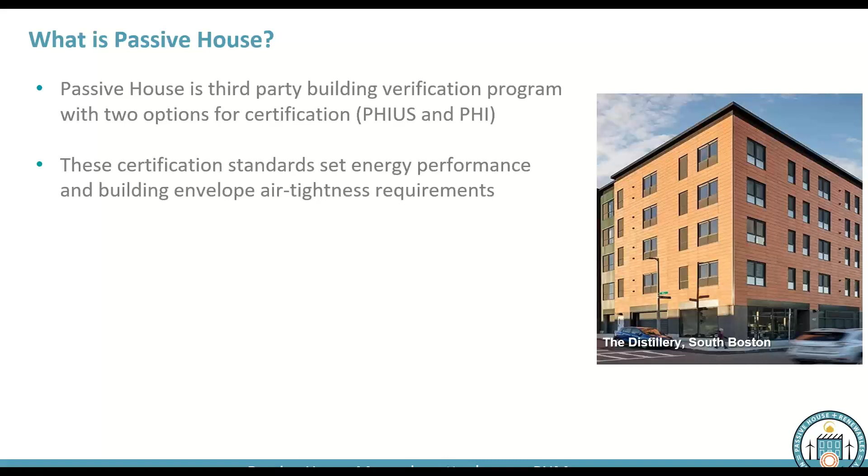The standards themselves are set based on energy performance and building envelope air tightness requirements. So that's sort of where the standard for Passive House comes from, energy performance metrics and air tightness requirements. We'll get into a little bit of those details to give you an idea of what those metrics look like a little later today.

Passive House buildings are designed and constructed to meet these metrics, and they can do that with any various methods, materials, strategies, anything that the architects, contractors, engineers involved can come up with. There's no prescriptive list, no checklist of things you have to do during construction, no points awarded in different categories. Simply these metrics that you hit at the end of the day, and however you manage to do that, you're able to do.

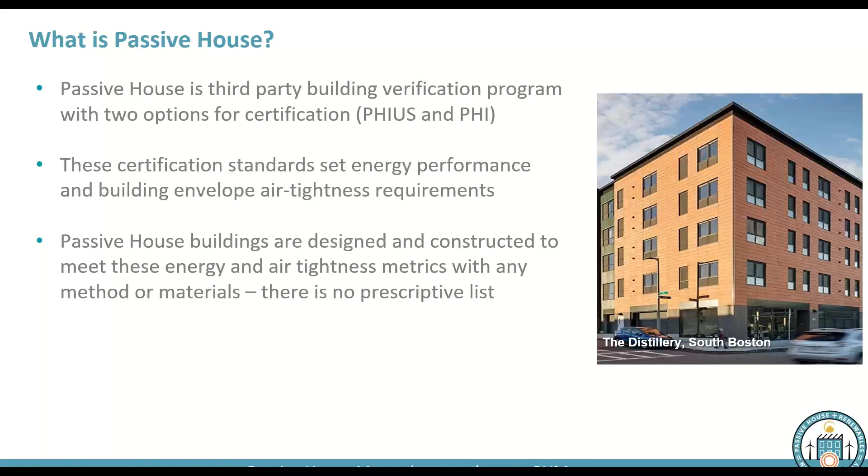So what do you achieve by doing Passive House? Heating loads, which are probably the main focus where Passive House really zeroes in, or at least originally where Passive House focused, was on reducing heating loads, and they're reduced by 90% or more compared to a typical building. This can vary a little based on what we consider a typical building, but as a general statement, it's 90% or more compared to a typical building.

Overall energy demand, so when we look at heating, cooling, hot water, plug loads, appliances, all energy in a building, that can be reduced by 60% or more. We're going to take a look at some actual data a little later to show how accurate this actually is. We are talking about 60% or more reduction in total energy.

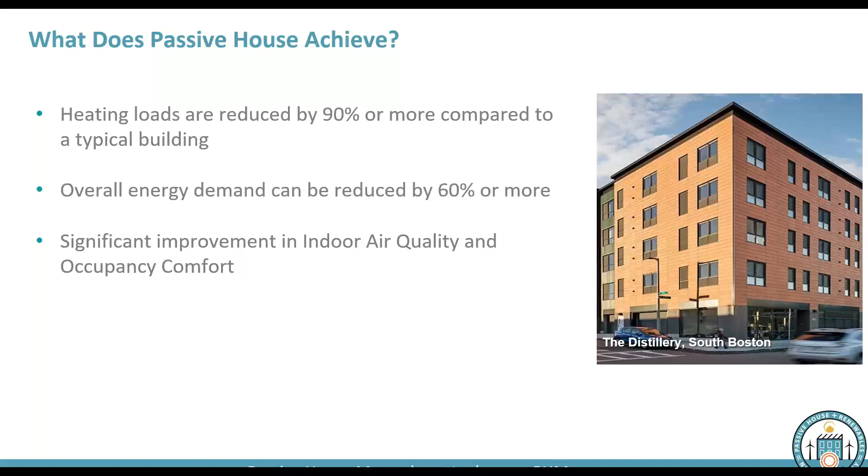We also see a significant improvement in indoor air quality and occupancy comfort. We don't have enough data, I think, to really say we see a 60% improvement in indoor air quality or something along those lines, but we know there is a significant improvement. And it's becoming a larger and larger reason why a lot of developers, especially in the case of larger project developers or single-family clients who are pursuing this, are pursuing Passive House.

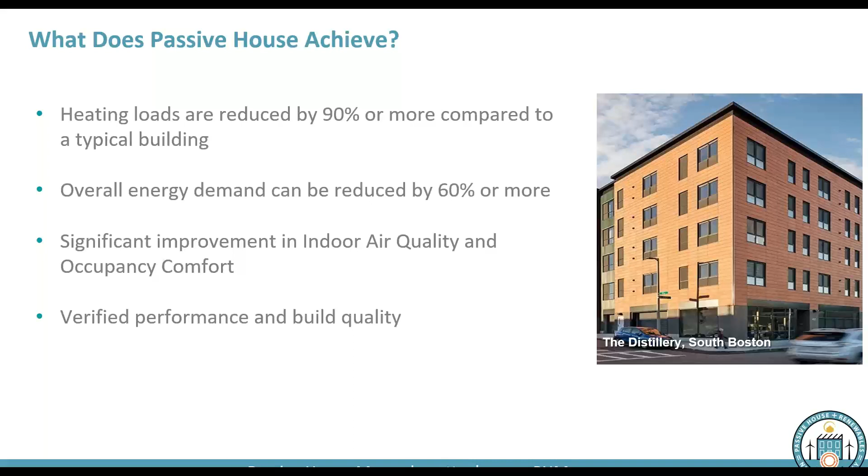Energy performance is one thing, but a lot are pursuing it because it just produces a better quality environment to be in. Passive House also achieves verified performance and build quality. You have third-party assurance coming in and verifying your project, making sure it's built how it's supposed to be built, making sure the quality level is high. That way you're delivering a really well-built, well-constructed building that's going to perform to these levels of energy reduction for a long time, that's going to last for a long time, and resist building failure issues that might come up in more typical projects.

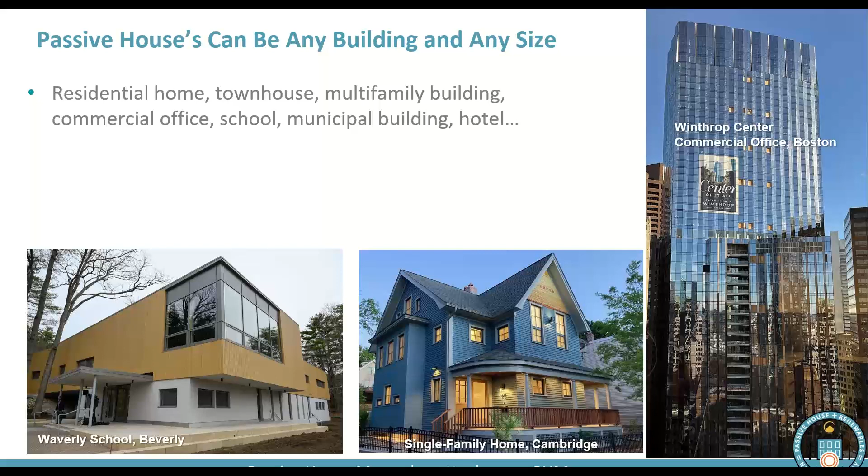So these are some of the big things that, by building to the Passive House standard, you're able to achieve. As I mentioned at the beginning, Passive Houses can be any building. Despite the name, we see homes, townhouses, multifamily buildings, commercial offices, schools, municipal buildings, hotels, even a hospital I'm going to show you in a moment. Any building type can be a Passive House. All three of these projects you're seeing are actually up in Massachusetts, but we have a school, a single-family home, and a large commercial tower. So any building can be a Passive House.

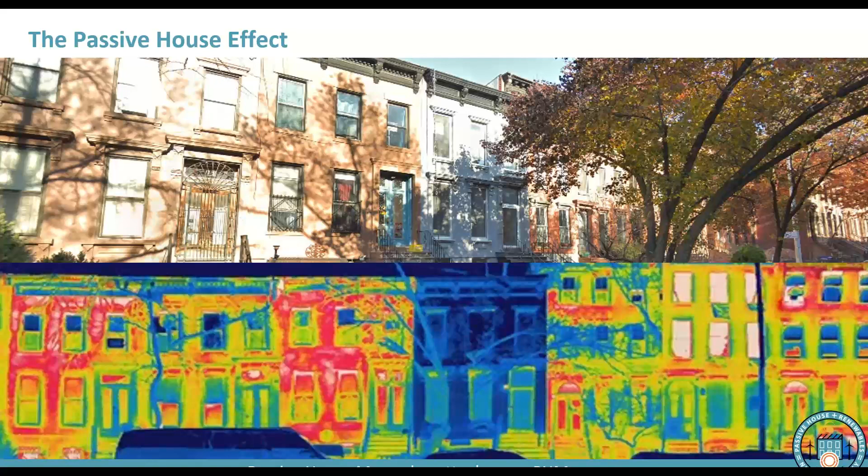So on a passive house project, there's all kinds of different roles that people take on. And as you explore passive house, you're going to learn about these different roles, you're going to hear them, so I wanted to provide a little summary to give you an idea of what these roles are.

Starting with the design phase, we have what are called consultants or designers. They're usually going to be a PHIUS certified consultant or a PHI certified designer. So you might hear acronyms like CPHC or CPHD - that's what those are referring to, these certified consultants. These are the primary leads on the passive house process.

On a project, one of the first things a developer will bring on is this passive house consultant. Sometimes these are in-house with an architecture firm, so whoever the architect is on the project might have the CPHC in-house. Other times they're an outside consultant brought in specifically for that project. It varies from project to project what approach is taken, but either way, you're going to have a certified professional involved who's going to take the lead on the passive house aspects of it.

You're going to have an energy modeler. This person takes the lead on running your energy model. Passive house uses very specific energy modeling platforms, known as WUFI or PHPP. Both exist - generally, projects certified under the PHIUS method use WUFI, and those certified under the PHI method use the PHPP. But both are similar and do similar things. They're energy modeling software, so you're going to have an energy model.

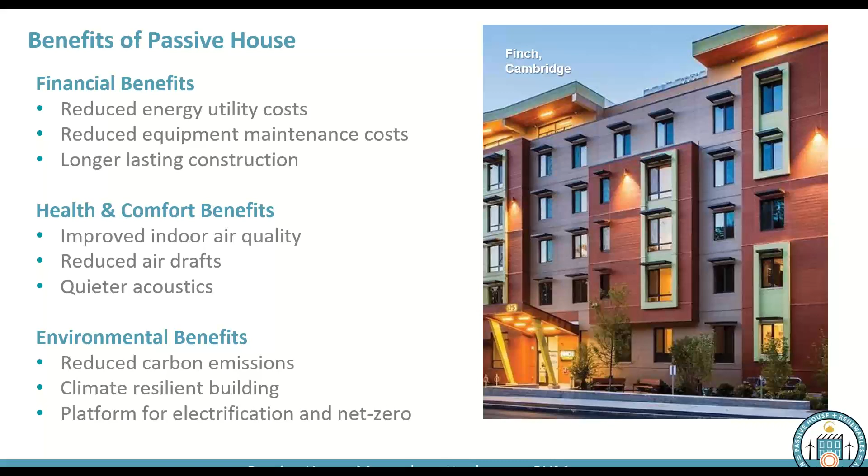So those goals are not required, but passive house provides a really good platform for the building to achieve them. This is a little bit on that climate resilient piece. Climate resilient sort of means a lot of different things - this is just one aspect of what climate resilient means, but it's, I think, a pretty critical one.

So this homeowner in this newly renovated passive house, the power went out about 1 a.m. When they woke up that morning, it was 9 degrees outside, 62 degrees inside their house. Their neighbor's house, which was not a passive house, was already down to 36 degrees. That's not comfortable, and for many people is quite dangerous.

A passive house allows us, even though we are relying on mechanical equipment to produce our heating, cooling, and ventilation, to keep that heat in for a longer period of time before it dissipates to the outside when that equipment isn't working because of a power outage. That is one way we talk about a climate resilient building. No matter what type of extreme weather conditions or power outage situations are happening outside, you can maintain a comfortable temperature for a lot longer, and hopefully withstand the duration of those extreme weather conditions or power outages.

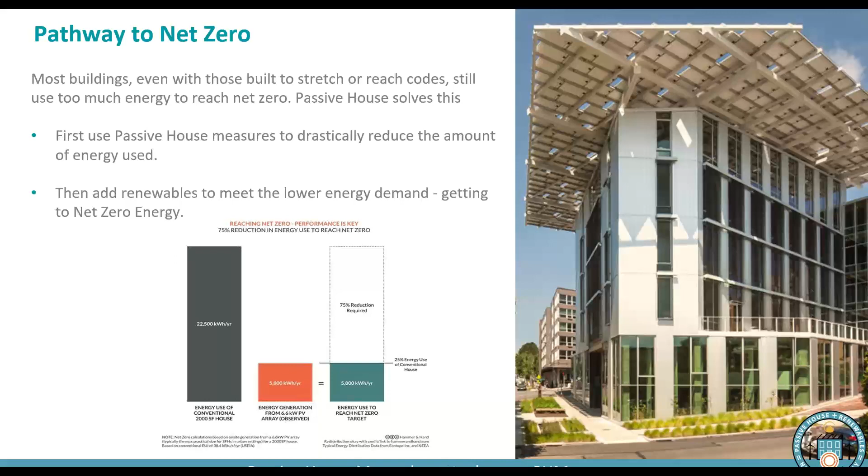That's kind of the main idea of what we mean when we say Passive House provides a platform to net zero. By focusing on that high level of energy reduction, we make it possible for buildings in a lot of cases to fit enough solar right there on site to be net zero.

I also want to add that affordable housing and Passive House are a great mix. Here in Massachusetts, we've seen enormous support for Passive House from the affordable housing community. Just last year in 2023, about 40% of affordable housing projects in the state were attempting to achieve the Passive House standard, which is pretty incredible numbers.

I don't know what those numbers are in Connecticut, so I can't share those, but I do know that Connecticut is one of the states that awards extra points in their qualified allocation proposal plan, the QAP, for Passive House projects. So if you are going for affordable housing financing in the state and pursuing Passive House in your proposal, you're given extra consideration. Connecticut has done that for a while now. The number of points have varied every time they release a new draft of the plan, but it's there, and it's an enormous benefit and incentive for affordable housing projects to achieve Passive House.

A little bit in terms of cost: these numbers are from Massachusetts, so that's the data I have at this moment. MassCEC funded several different projects with the goal of proving or showcasing how Passive House could have low costs. Their goal was a 3 to 4% cost premium, and they wanted all their projects to have less than that. They ended up with an average of 2% cost premium across all these projects. It's worth noting this was done in 2018, so these projects are at this point old. We expect most new multifamily projects to be in that 0 to 1% cost premium category. The costs have come down dramatically.

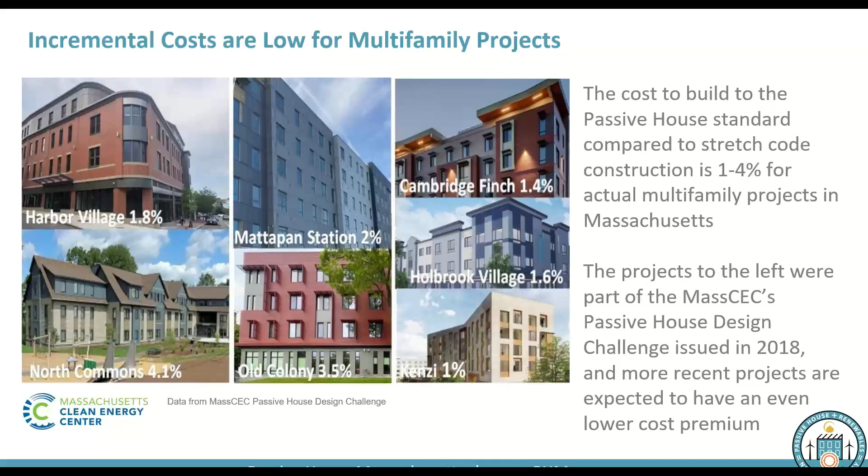Here's some more data to showcase this. This is from Pennsylvania, related to the affordable housing financing I mentioned that Connecticut is doing. Pennsylvania was actually the first state to do that, starting in 2016. In the first year, of all the projects awarded affordable housing financing, some were Passive House and some were not. The Passive House ones had about 2% more cost than the non-Passive House ones.

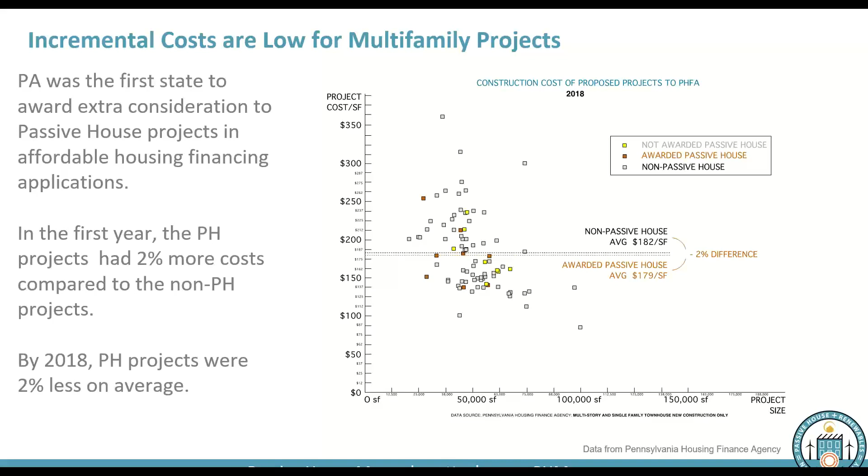By 2018, the Passive House projects were about 2% less costly, which was really surprising to see. On average, they're seeing pretty much cost parity. So between projects achieving Passive House and projects not achieving it, cost is not really a factor. That's basically what their data is showing.

So that was cost data. Now we're going to look at performance data, specifically energy performance. As I mentioned at the beginning, one of the goals of Passive House is around a 60% or greater reduction in total energy demand of the building.

So here are some projects. This is the Distillery, the first multifamily Passive House project built in Massachusetts, and this is data from that project. We're looking at EUI, or energy use intensity, which is the total energy use of the building divided by its square footage to normalize it. In general, similar multifamily buildings in the Boston area average around a 62 EUI. The Distillery achieved a 24, or 60% less energy — exactly what we hoped it would.

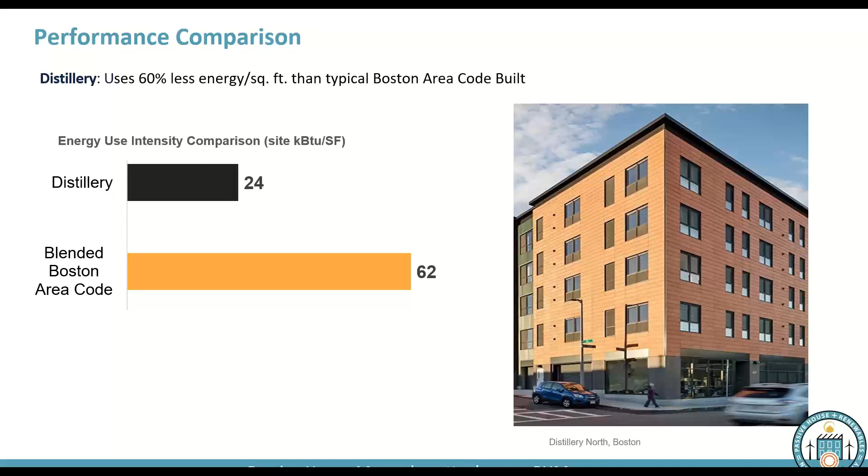This is Gilford Village, a project up in New Hampshire. I wanted to showcase this one because they built it in multiple phases — three phases. The first one you don't need to worry about, but the second was built to LEED standard, and the third was built to Passive House standards. Other than achieving Passive House, the third phase was fairly similar to the second in architectural style and other features. So it's really just the extra things they needed to do to achieve Passive House that made it different.

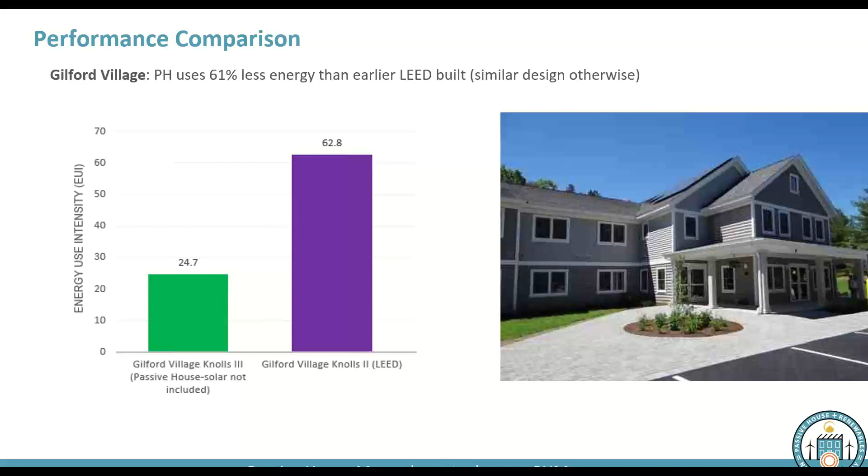And you can look at the EUI — they went from a 62 in the phase 2 LEED building to a 24.7 in the Passive House building. Incredible improvement.

Lastly, this is one more slide on energy performance to show some different data, again from Pennsylvania. As I mentioned, they were the first state to take a big jump into the affordable housing Passive House world. So now we're looking at some of the projects that went through that affordable housing financing — these were all various dots on the chart I showed earlier. Here we're comparing: the blue bars are regular code-built projects, the orange ones were built to achieve LEED, and the gray ones on the far left were built to achieve Passive House.

You're seeing the EUI compared. The first obvious takeaway is the average EUI is dramatically lower for Passive House projects than for either LEED or general code-built projects. But the other takeaway I like about this is it shows the variability. Code projects are all over the map — code doesn't require a low EUI, but some projects achieve it because they can, while others end up with a higher one. Average code projects do not have a low EUI; it's all over the map.

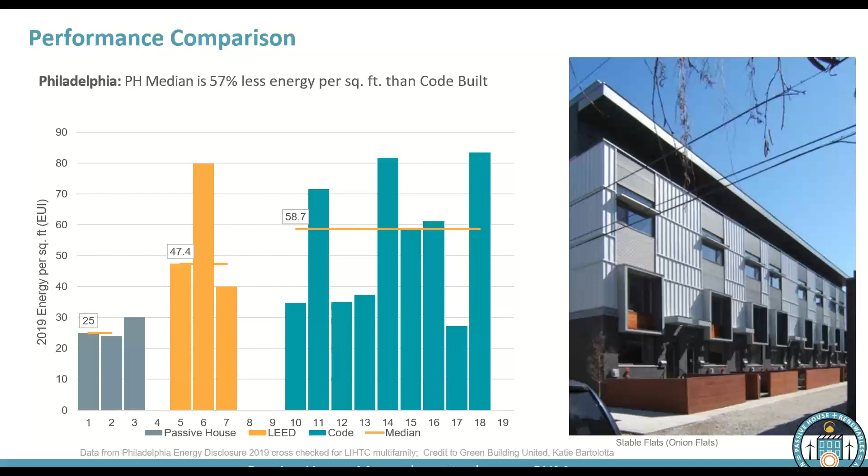LEED projects, on average, have a lower EUI than code-built projects, but again show high variation. Some are not very well performing in EUI — they may have focused on other aspects of the LEED program, paying more attention to other sustainability features that LEED awards, so maybe energy wasn't the focus, hence the variation. When you get down to Passive House, not only do you have a lower average energy use, you also have greater predictability. That's one of the features I've mentioned already and will mention again — Passive House delivers a much higher level of predictability. You know what you're going to get when you build a Passive House.

What I'm going to move on to now is talking a little bit about the passive house standard itself, getting to a little bit about what it is, where it comes from, what are the metrics, that sort of thing. We're doing pretty good on time. I haven't seen any questions come up. If you guys have them, remember, jump in, ask questions, let me know. I can address some while I continue to talk, and the rest I can address at the end of the presentation.

As I mentioned earlier, there are two organizations that certify passive house projects: the Passive House Institute, or PHI, and the Passive House Institute US, generally known as PHIUS. Both of these organizations exist at the same time. They both create and manage their own passive house standard, and they both certify buildings right here in the US. So despite PHIUS being the US version, they both certify buildings here in the US.

And in Connecticut, there are projects certified under PHIUS, and there are projects certified under PHI. To be clear, you would not achieve both of these. Any project, you're going to pick one of these to go with. They're very similar, but they do have their slight differences. But either way, they're both going to manage the passive house standard. They're going to define the metrics and criteria for what you need, and they're going to provide that certification for buildings.

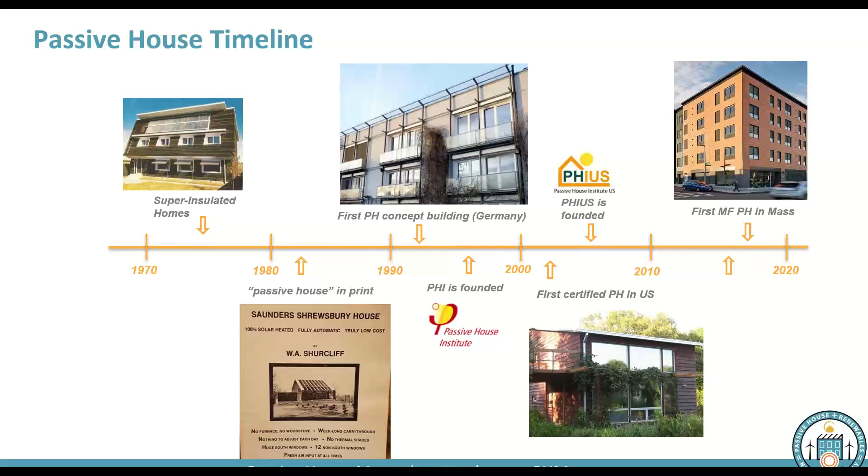So that's a very brief look at the history of Passive House, but that's how we got to where we are today. Again, I think just the important thing to know is that there's two standards out there that provides some sort of market choice. You can look between the two of them and decide which one you want to pursue for your project.

So what are these requirements? I keep talking about energy performance metrics and requirements - what are they? Passive House requires performance criteria and then some other things. We're going to talk about performance criteria today. That criteria is divided into three buckets. You have your heating and cooling demand.

So that's how much energy you use to heat or cool your building. You have whole building air tightness - simply put, how airtight is your building, how much air is moving through it. And then your source energy demand. Source energy demand is just a way of thinking about overall energy use of the building. For those out there familiar with the difference between site energy and source energy, we're pretty consistently talking about source energy.

For those unfamiliar, we're not going to get into it right now—if you have questions, ask. But PHIUS and PHI are both concerned with overall source energy. It's good to know there's other criteria, but we're not going to talk too much about them today.

The Passive House standard, when we verify buildings and make sure they're being built correctly, also looks at things like ventilation rates and moisture management and other aspects beyond just performance. But those are the big ones.

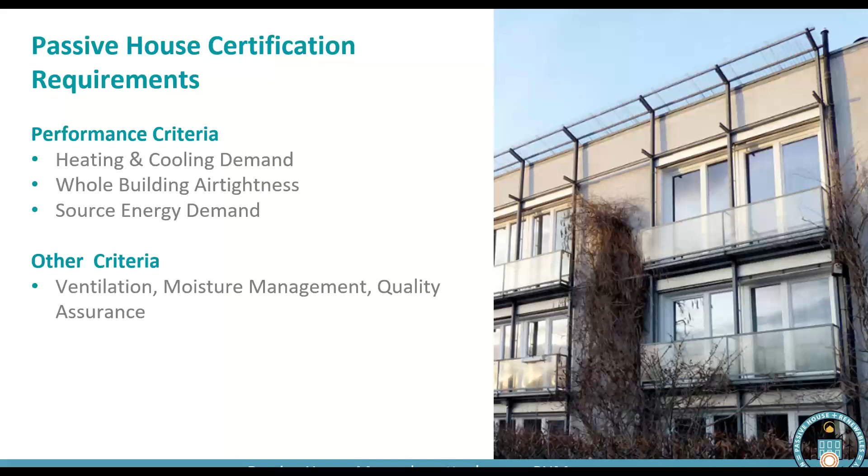This is just a visualization of what these metrics are attempting to do. On the right, you're seeing an old leaky house, divided on the top and bottom between heat gains and heat losses. You can think of this in terms of cooling gains and losses too, but that's a bit different—we're just going to focus on heat gains and losses to give you an idea of what we're talking about.

In a leaky building, you have all different sources of heat loss at the bottom. Heat is lost through your walls from poor insulation or lack of insulation, up through your roof, through your floor, or cold air coming in through the floor. Your windows are leaky, your doors, and you have inadequate ventilation systems.

You then have your heat gains, which are meant to make up for those heat losses. Some heat gains come from solar heat gain—in the winter, sunlight coming through your windows helps produce a little heat energy. You also have internal heat gains: us, people, produce heat, appliances produce heat, and there are other sources. But you can see on the graph that solar and internal gains are pretty small.

So the vast majority of the way we replace all those heat losses is through our heating systems. When you get into a more modern house, you're trying to reduce the amount of losses so you can have a smaller heating system. Pretty simple. Passive House does that at a very dramatic level.

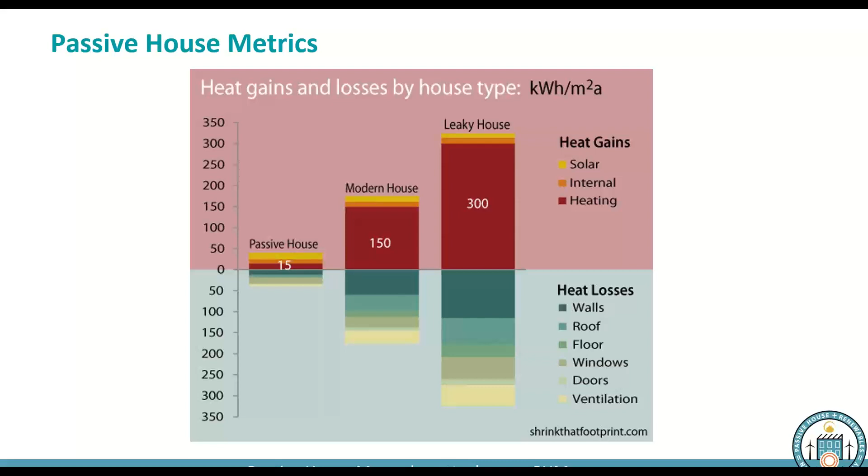We're putting a lot of focus into reducing heat losses through the walls, roof, floor, windows, and ventilation system, so we don't have to produce much energy at all. We still produce a little, but not much. In fact, the amount of heat gain we're producing from the heating system is about the same as what we're trying to get from the sun. If you can imagine how little heat that is, that's what we're trying to produce in these buildings—that's how little is required. We're minimizing heat losses in order to minimize heat gains.

So what are the actual metrics? This is going to be the one time I really talk about numbers—if you like this slide and want more detail, join us next week. We're going to talk about heating demand right now: 4.8 kBtus per square foot, up to about 6.5 kBtus per foot. What does that mean? If you're building a Passive House project, you're going to have a heating demand metric you have to achieve. That metric will vary from project to project, but it's going to be in this range of 4.8 to 6.5. Let's say it's 4.8.

That's going to mean the max amount of energy your building can use per year for heating—4.8 kBTUs per square foot of that building per year. To put that in perspective, an old inefficient building running on natural gas might be around 55 kBTUs per square foot. So we're seeing a pretty dramatic reduction right there.

You're also going to have goals for cooling demand, a separate number from heating demand. That cooling demand is going to vary from around 2.5 to 4.8. These numbers are for us here in the New England area, and generally speaking, metrics can vary depending on where you're located. In more cooling dominant climates, you might be allocated a bit more for cooling and less for heat. But here in New England, we generally see heating metrics being about 4.8 to 6.5, and cooling metrics being about 2.5 up to 4.8. That's the maximum you're allocated, and you have to achieve that.

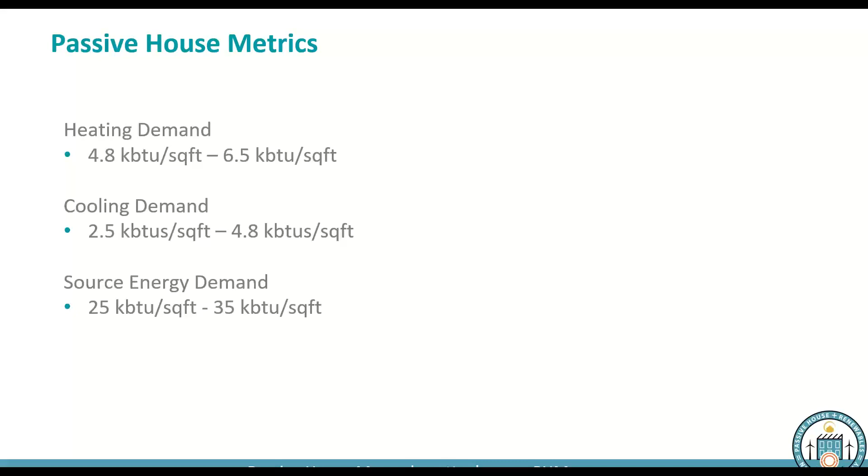Again, these are general numbers. When you're actually going for certification, you're going to work with PHIUS or PHI, or you might be working with your consultants to get your specific numbers provided. These are meant to be general ones to provide you some guidance. Here's that graph showing the multifamily building energy use comparison. The number I cited at 118 is from Energy Star data. Pretty dramatic reduction, I'd say.

So those are the energy performance metrics. I also talked about air tightness - this is what we're looking at. The general building energy code requires around 3 air changes per hour at 50 pascals of pressure. If that doesn't mean anything to you, don't worry about it, but for those who know what we're talking about with ACH, you'll get a clear idea of the difference. A passive house requires 0.6 at the maximum, so your building needs to achieve 0.6 ACH50 or lower.

The photo is showing you a blower door, because this is measured on site with a blower door test. They run a whole building blower door test as the final step in construction. When everything's finished, you run that test, and your goal is to achieve 0.6 or less. I like showing this on a separate slide with big numbers like this, because for most project teams, this is the key metric to look at. You're going to know these numbers from the very beginning, work them into your energy model, and modify your design to meet them, making sure your energy model shows you meeting these.

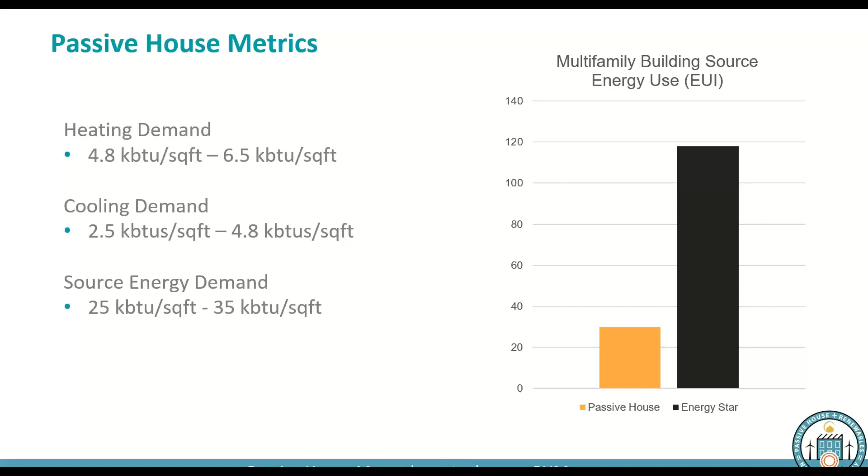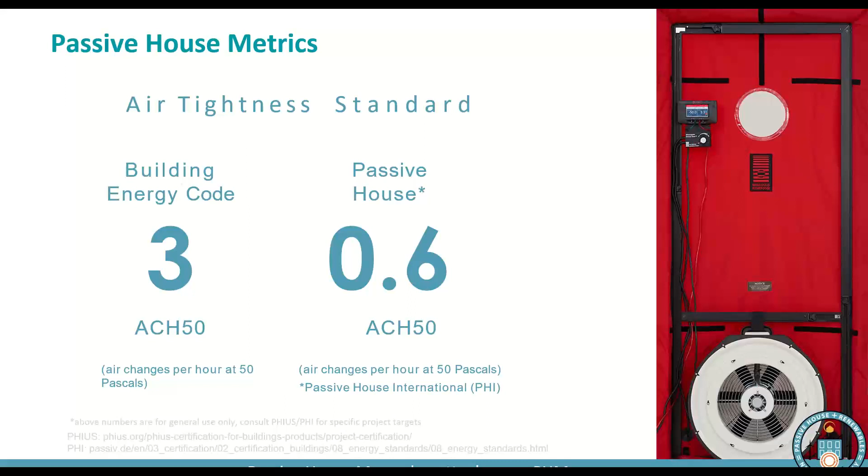I don't want to say this is necessarily going to be simple - I just want to say that you're going to figure out early if you can do this or not. But actually doing it takes focus throughout the entire phase of the project, particularly during construction. There's so much that happens as the building is constructed that influences this metric, from the air barrier being put up to every time a sub comes out and puts a penetration through that air barrier - how is that being sealed, how is that being taped. There are so many things that can influence this metric that it takes a lot of focus. For most teams, this is the real number the whole team is focused on hitting.

A little bit about the process - how to think through the steps in a passive house. You're going to start with the pre-design phase. I'd suggest you could start by conducting a passive house feasibility study. As Anna mentioned, this is funded through the incentive program - you can get a feasibility study funded up to a certain amount.

Do the feasibility study. During that process, you're going to work to choose a Passive House standard, as I mentioned, PHI or PHIUS. You'll register or pre-register with that organization, either PHIUS or through a PHI certifier, and then bring on your Passive House consultant or designer. You might not do that in that order—you might bring on a Passive House consultant first, and that consultant will help you figure out which certification standard to achieve. But those are your early pre-design steps.

And then you're going to get into the design phase. Now you're going to work with your consultant, and the whole design team is going to work together with them. When I say the design team, I mean the architect, but also your structural engineer and mechanical engineers. They should be involved early, helping you make sure you're designing the right mechanical system for the project, for example.

You're going to be working with the consultant and with the energy modeler, who's going to run an energy model. This is the integrative approach—you don't just design, then model, then build. You design, model, and modify the design, modify the model, probably modify the design again. You do this a few times until you have the design you want that meets your model and all the other requirements of your project.

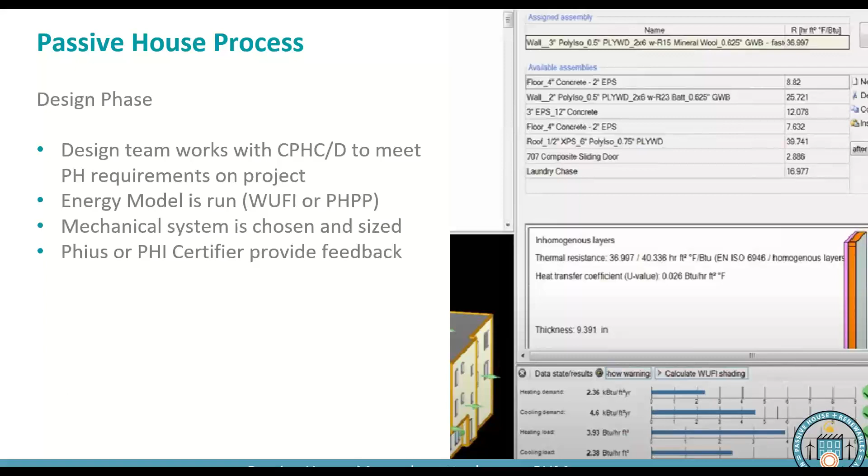You're also going to be working during this phase, submitting your model and your design to PHIUS or to your PHI certifier. They're going to provide you with feedback as well, so there is assistance with this—you're not left to your own devices. You're going to have feedback, and you're going to have folks there to answer your questions.

You're also going to have on-site verification during this phase. So during construction, your PHIUS verifier, for example, is going to be on-site at different points, inspecting the project, taking photos, checking over the air barrier, looking for signs of leaks or things that might need to be addressed. You're also going to run blower-door tests. There's that final step, the whole-building blower-door test, to make sure you hit the metric. But honestly, projects are running multiple blower-door tests during different phases of construction as pre-checks, just to help make sure they're on the path to meeting it.

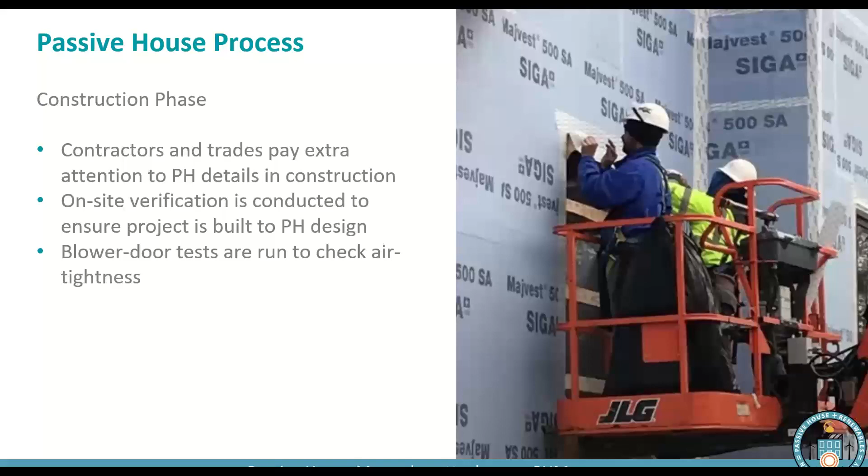And then you get to your last phase, certification. You're going to get your plaque, you're going to get all the information, you're going to be certified—you have built a passive house. Way to go. So there you go, it's not that different from a normal project. In a lot of cases, it's simply bringing people together early, making sure you have that whole team together and on the same page, and making sure you're paying attention to those details, things like the air barrier, for example.

So now I'm going to show some slides of just some examples, so you can get an idea of what projects we're talking about. I'm going to start with some right there in Connecticut, and then we'll take a look at some around different places as well, just to get a different idea.

But this is just meant to give you an idea of what projects look like, what we're trying to shoot. Sorry, looking at the time here.

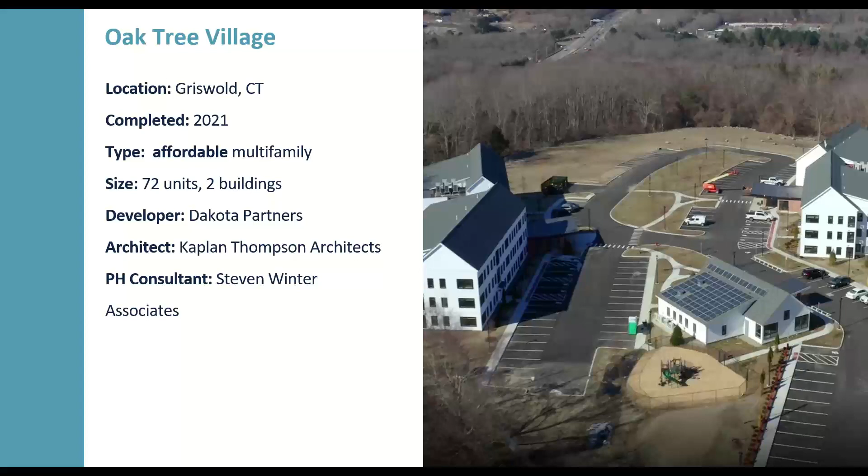Now I'm going to jump up here to Massachusetts. This is Finch, Cambridge. That photo I showed you of that guy very carefully applying the air sealing tape, that was on this project. So this is all affordable, 98 units of affordable housing.

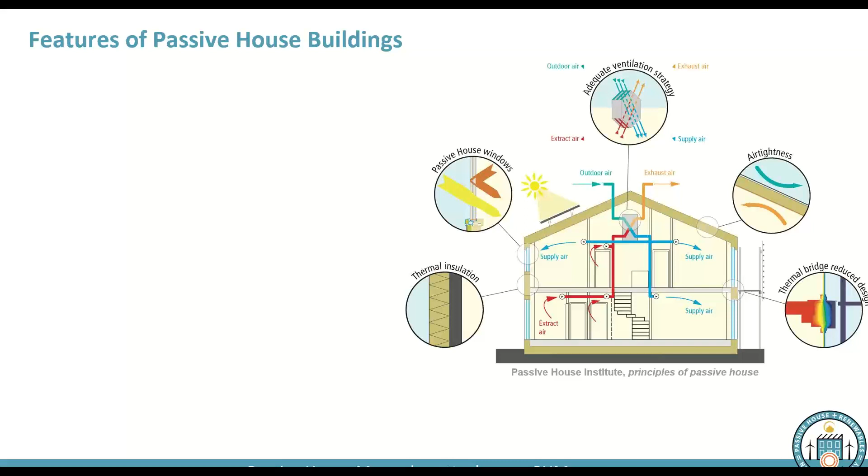Now we're going to get into features of Passive House. This is going to be an introductory level discussion of the features of Passive House buildings. All the things I talk about here, I'm going to dive much more in depth into next week, but this is meant to give you an overview. So all these buildings I just showed you, what are they doing to achieve Passive House? Well, these are the main things. We can divide them into building envelope and mechanical systems.

In the building envelope, we're looking mainly at continuous thermal insulation. You can think of that as throwing a sweater around the building to keep the heat in. We're also making an airtight envelope. You can think of that as putting a windbreaker over your sweater on a windy day. As we all know, that sweater might not keep the wind out, but wearing that windbreaker does. And that's what the airtight building envelope does.

Then we're doing thermal bridge mitigation. This is identifying places where there's weak points in the envelope where there's not insulation or some other material, or mitigating that impact. We're using better performing windows and doors, and we're optimizing these projects to take advantage of solar heat gain. So we want to increase the amount of sunlight we're getting into these projects in the winter. We also want to make sure we're not getting too much sunlight in the summer, so we use different types of shading features and overhangs and other things to help make sure we're not overheating projects in the summertime.

So those are the building envelope features. Those are all the things you can think about. If you think about that earlier slide comparing heat losses and heat gains, these are all the things that we do on a project to minimize heat losses, focusing on the building envelope.

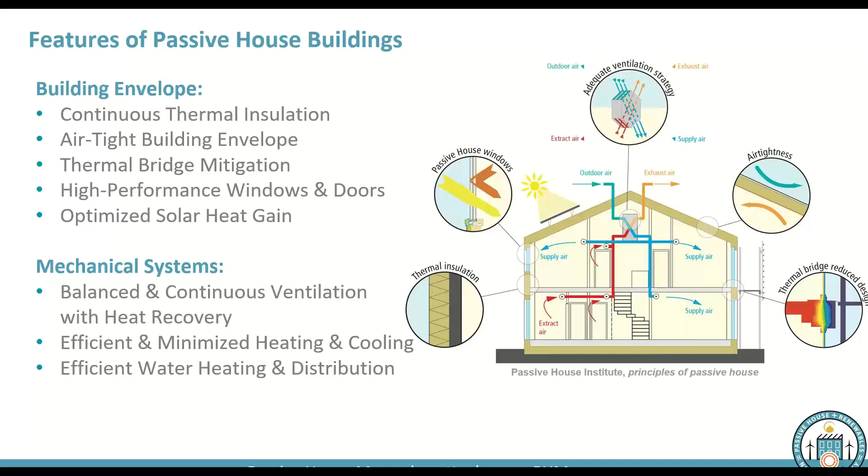We then have the mechanical systems. These are the ways that we actually provide heat or provide cooling and ventilation, but we're mainly using balanced and continuous ventilation systems. I'll talk about this in a moment. We're also using efficient and minimized heating and cooling, and efficient water heating distribution. As you can see, the word popping up a lot: efficient, minimized, balanced, kind of keywords there for mechanical systems. But these are the key features of Passive House projects.

So dense packed cellulose, dense packed fiberglass, sometimes mineral wool. There's all sorts of different materials, and we'll dive more into that next week in terms of what common materials are being used in this area. We're putting as much insulation into those cavities as we can.

We're then also reducing thermal bridging. I'll talk a little bit about that here in a moment, but in the case of a building like this, the thermal bridging is mainly coming from the wood studs, from the framing. Those wood studs have no insulation; they have an R value of about 1, so they're good at conducting thermal conductivity, and we want to limit that. One way we do that might be by spreading the framing members out a little bit more, rather than say 16 inches on center, we do 24 inches on center. That reduces the amount of thermal bridges. That continuous insulation layer that wraps around also reduces the impact of thermal bridges; it provides some level of insulation for those.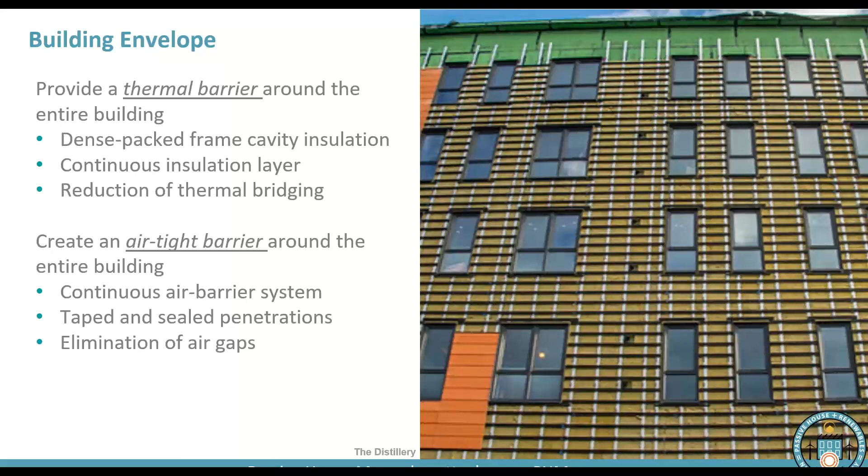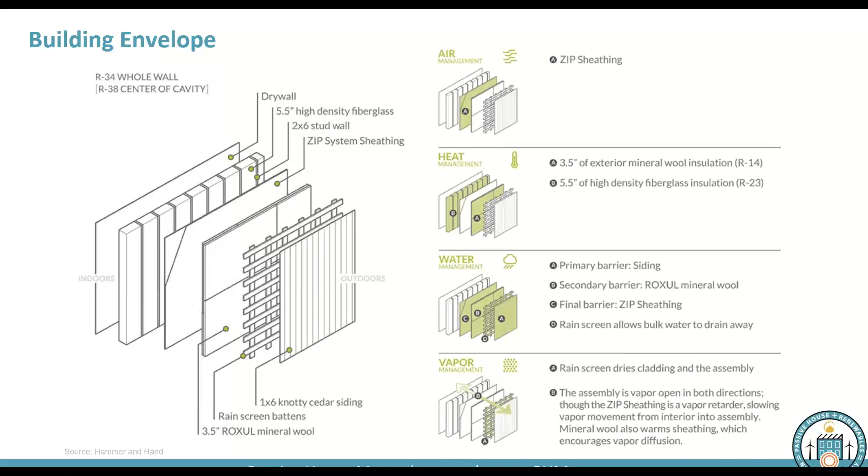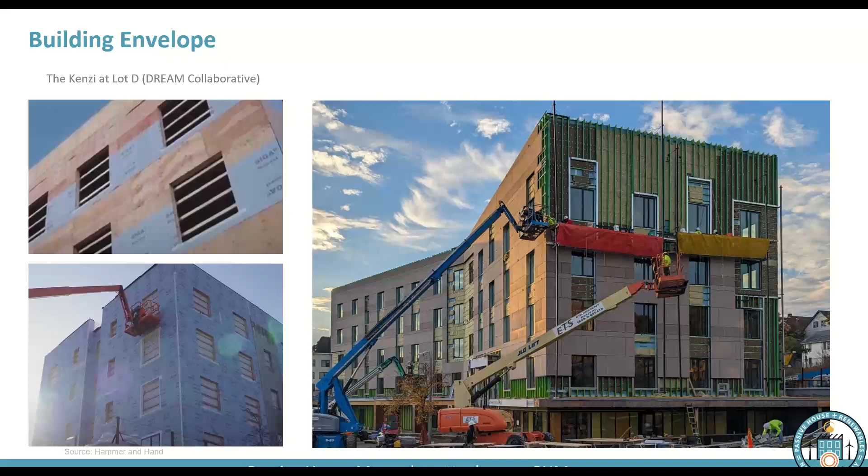On the bottom left, you're seeing them do the taping around the window bucks, around the rough openings of the windows. They're doing the full taping for the air barrier so that they connect the air barrier to the inside of the windows. On the right, they're putting the siding up, showing you the insulation—mineral wool in this case—the rain screen they're using, and then the siding being attached to that.

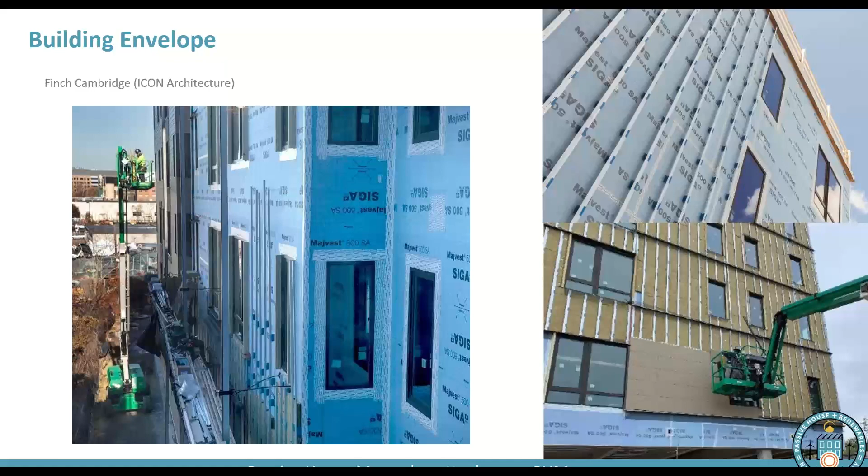I mentioned wood studs being one example of a thermal bridge. Fasteners are another example, because they go right through the wall and they're usually metal, so they transfer heat right through them. So there's different methods, when we install insulation on the outside of the building or install siding, to either reduce the number of fasteners or use different systems that minimize how many fasteners go all the way through the wall rather than just partway through. It's something to always keep in mind: that air barrier can be really well done, but if you're putting too many penetrations through it, you're going to dramatically weaken it.

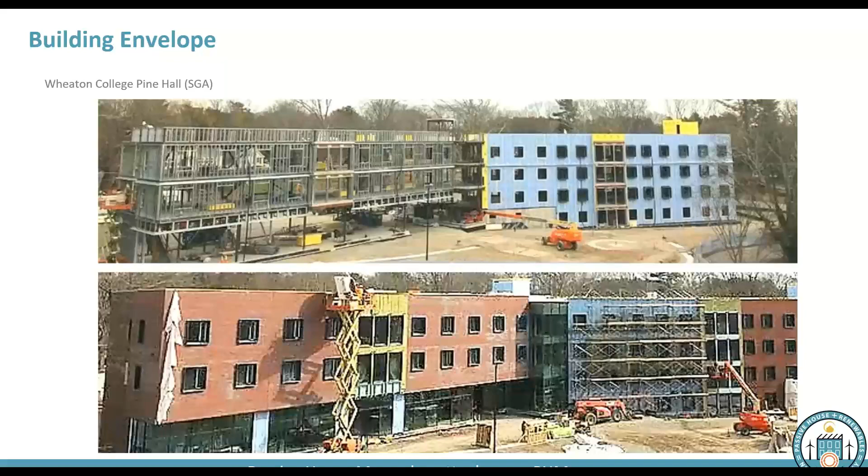A big difference here: in the Finch Cambridge project, that mineral wool is about 2 inches thick. On this project, they use 5 inches of mineral wool. A big reason for that is simply the thermal bridging impact of the metal versus the thermal bridging impact of the wood in the other case.

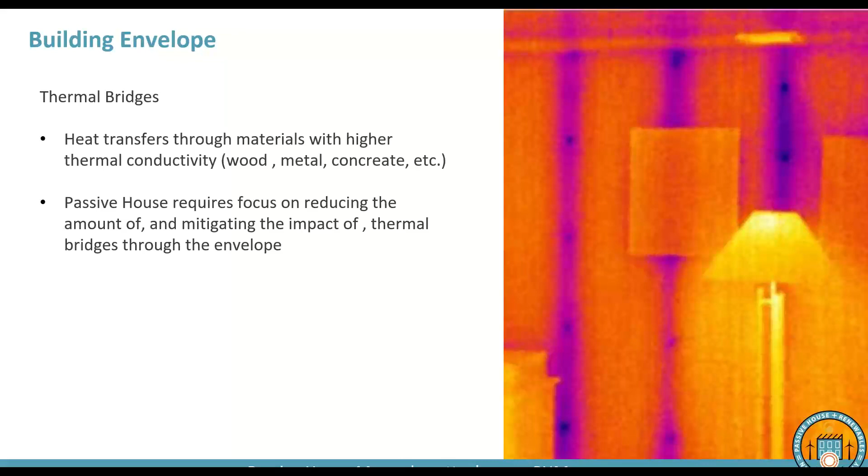This is one slide on thermal bridging—we can talk more about this next week. This is just showing what we mean: heat transfers through materials with higher conductivity—wood, metal, concrete, etc. Passive house requires a focus on reducing the amount of thermal bridges and mitigating the impact of the ones that do exist. This thermal image on the right shows the inside of a house looking out, and you can see the wood studs very clearly. You can also see the fasteners very clearly—whether screws or nails, either way they're a piece of metal transmitting heat directly through that wall. So we want to minimize that impact on our buildings.

So that's building envelope systems. Now let's talk about the mechanical system. The building envelope systems reduce heat losses; now the mechanical systems make up for that with heat gain. We're not going to get into it in this section, but we do have solar heat gain and internal heat gain from us, as mentioned. Generally, that's not going to be enough—we do need some mechanical sources, divided generally into heating, cooling, ventilation, and hot water.

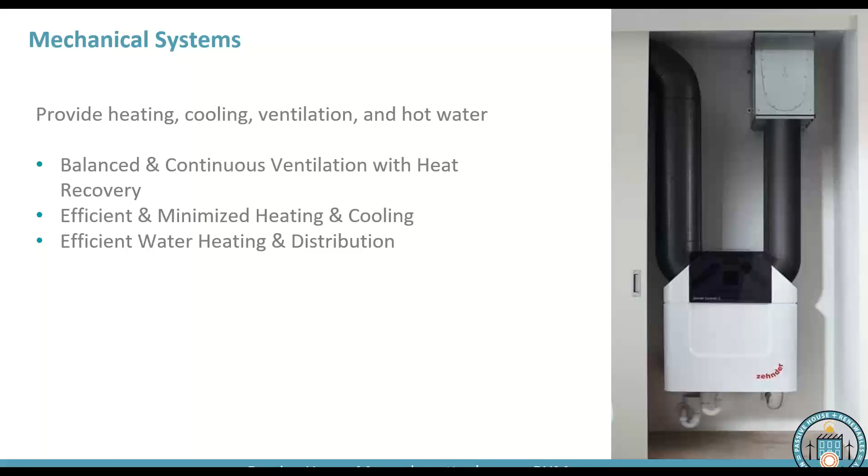I'm going to give a very, very quick overview on mechanical systems. We'll go more into mechanical system sizing and design next week. This just gives you a general introduction to the ventilation and to the heating and cooling systems—we're not really going to talk about water right now. So when it comes to ventilation, we are providing a balanced, continuously running ventilation system.

You're pretty much always going to see something called an energy recovery ventilator or a heat recovery ventilator, ERV or HRV. These are two terms used to describe something that is pretty much the same thing, with a very minor difference between them. That difference relates to how they deal with humidity. Energy recovery ventilators deal a little bit better with humidity, so in this climate we tend to see ERVs used more often. But either way, these systems work the same way.

They're going to be continuously running, so they're not cycling on and off. They're always running, though they may have different fan speeds that increase or decrease. You can think of these as the lungs of the building. You've probably heard the old adage that homes need to breathe. I hear that a lot when I talk about air tightness. People say, yes, but doesn't a home need to breathe? Yes, but not through holes in the body. It needs to breathe through a dedicated respiratory system, and that's what we provide with this. These are the lungs, and they're always working.

In addition to constantly providing air, it's also filtering that air constantly. So if we're talking about a wintertime period, you're taking that warm air that's inside, that's dirty, and taking it out, then taking air from the outside and bringing it in. And that air you're bringing in, you are filtering, so you're getting a high level of clean air coming into the space.

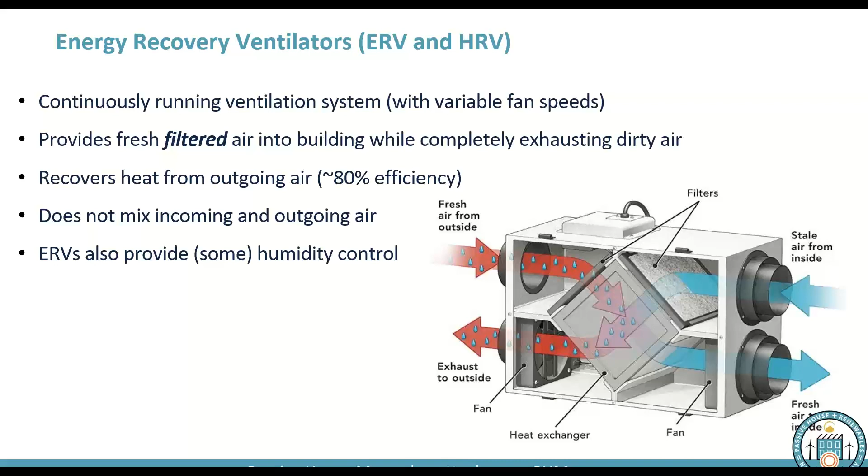And it does that without mixing the air, like you might see in a traditional ventilation system. Incredible concept that we do with these ventilation systems. So it doesn't mix the ingoing and outgoing air, it recovers some of the heat energy, and also provides ventilation at the same time. So that's ventilation.

When it comes to heating and cooling, there are different options. But when we zero in on the common features of all these different projects I've been showing you, it's pretty much always going to be some type of air source heat pump or a VRF system that works very similar to an air source heat pump. For those curious, I do see geothermal used sometimes, and there are other heating systems out there too. These aren't the only things, but the vast majority of projects are using air source heat pumps or a similar VRF system.

These systems are all electric, so they're running on electricity and providing both heating and cooling, depending on what you need at the time. They're incredibly efficient, about 200 to 400% efficiency. If you're familiar with electric baseboard heat, you've probably heard it uses a lot of electricity and is expensive. That's because it's only 100% efficient. These ones are at least twice as efficient, if not 3 to 4 times as efficient.

A new gas furnace might be 96% to 98% efficient. What that basically means is the amount of energy you're putting into the system, you're getting 2 to 4 times as much heat energy out of it. You're doing that because you're not converting electricity into heat directly. You're using electricity to power the compressor in the system, and that compressor is compressing air and extracting heat energy out of it, which is what's producing heat. You're able to extract a greater amount of heat energy from compressing the air than the comparable amount of energy you're putting into the system.

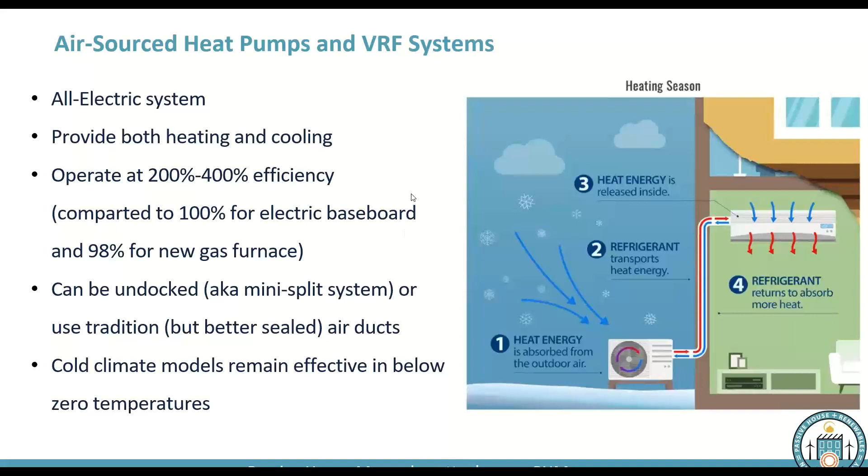Number 1, bring together your team early. As quickly as possible, get your passive house consultant or designer on board, but also bring your verifier or passive house certifier on as early as you can. Get them early on, giving you feedback on your project. Make sure your mechanical engineer is involved in that project early so that you can design the mechanical system in the right way.

Pay attention to your critical barriers. I talked a lot about thermal and air today, and I'm going to continue to talk about those in every one of these sessions, but also keep in mind water and vapor. Those are also important. Just make sure you know where those barriers are.

The best advice everyone gives is, for every drawing that is being submitted or sent to, say, the GC, have it in color and have your air barrier highlighted, have your thermal barrier highlighted in a different color. Make sure it's easily communicated and easily noticeable where your air barrier is, what materials are making up that air barrier, what materials are making up the transition from one barrier to the next, and so on.

Work with a mechanical engineer experienced in low energy buildings. I'll admit, not every mechanical engineer you talk to is going to have experience with passive house. That's the reality right now. Years down the road, they'll probably all have experience with passive house. But at this point, you're not going to find that everyone does.

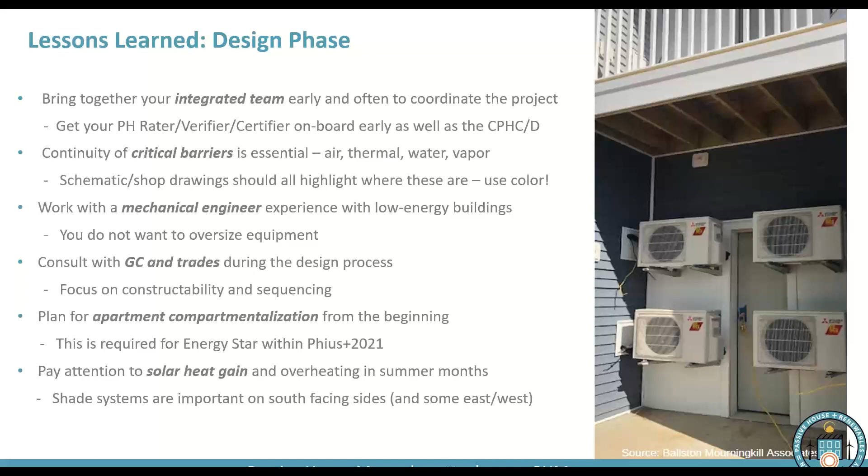Compartmentalization, solar heat gain - I'm not going to talk too much about those. I kind of hit on a little bit of them already.

Construction phase. So once you get to the construction phase, hold kickoff meetings. This is very important. These can take all kinds of different forms, but the point of these is simply having dedicated forums for communication to stress what the passive house details are. We all know there's going to be different people on that site every day. There's going to be trades there one week that are not there the next, and trades not there one week when you run a meeting who are going to be there the next week. So make sure you're finding regular ways to have meetings, bring people up to speed on what they need to know about the passive house details.

Use mock-ups on site. These have been incredibly important.

This is a common theme coming up on every slide, but know where your air barrier is. Make sure all the trades know where it is. A good tip that people have raised is to just assign somebody on site to be your air barrier manager. This could be somebody from the GC, or from another part of the team, who's in charge of monitoring that, making sure everybody's up to speed, and doing some kind of walkthroughs every now and then.

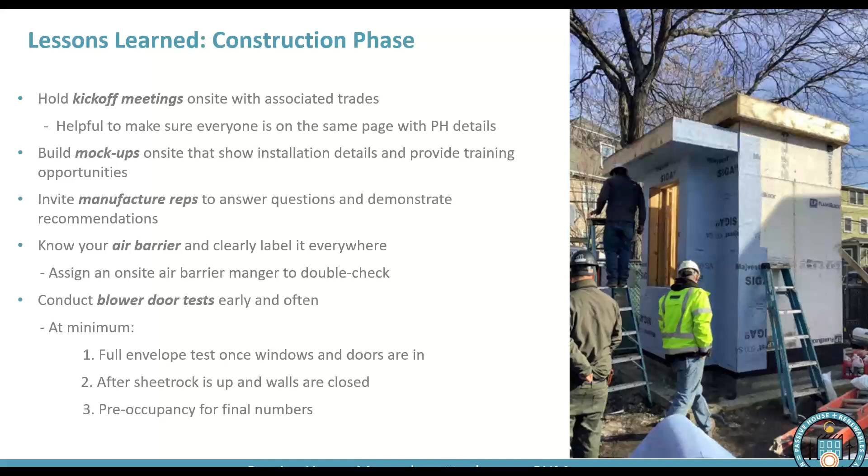So those are the big takeaways, those are the lessons from early teams. We went over a lot today — this was an introduction covering things from metrics to lessons learned to some examples of projects, lots of different things. But I'm going to pause now.